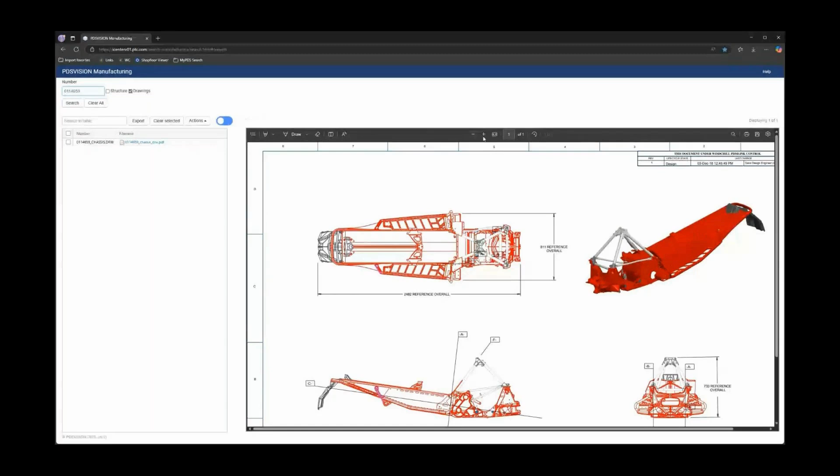Finally, we can swap over to a more manufacturing view, which is a cut down view simply used for retrieving drawings from within the system. If you've got people on the shop floor following a set of work instructions who need to follow a sequence of drawings, or quality wants to do the same, you can use the built-in inline viewer for users to quickly follow through a series of drawings on screen on the shop floor.

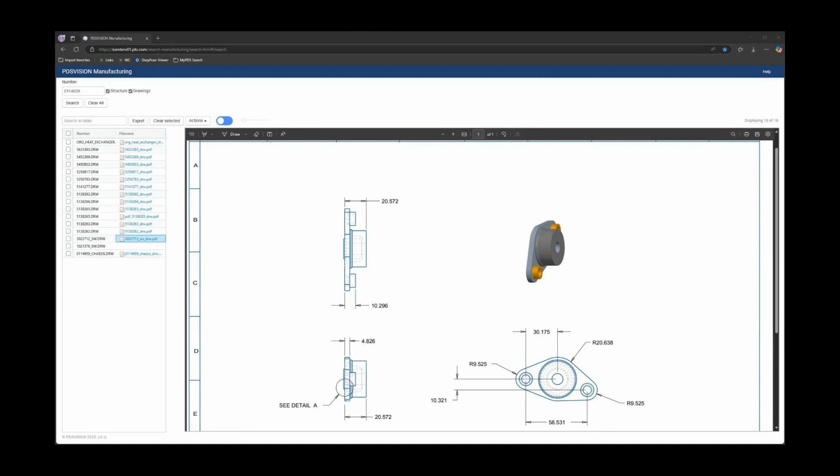So My PDS Search is highly configurable. You can have multiple different views for different departments within the business, giving everyone an extremely easy to use tool that can access and pull information out of the PLM tool.

For those infrequent users, Windchill can often feel a bit complex and off-putting, which leads to delays, data requests from other users within the business, or ultimately mistakes. My PDS Search is designed to simplify that access and reduce the burden on power users, making everyone more self-sufficient. It eliminates uncertainty, ensures users get the latest data, and automates repetitive lookup tasks.

We didn't show it, but you can have saved searches via URLs to perform the same search actions. Lots of different departments are often searching for the same stuff over and over again, and we can help automate that.

Search provides a clean and user-friendly interface that makes finding product data fast and intuitive. Whether you're in engineering, purchasing, or quality, you can locate drawings, documents, parts, and related objects without needing deep Windchill knowledge.

Something else we didn't show is a capability of My PDS Search called on-demand publishing. Users often request things from people in engineering, like 'can I have that drawing?' or 'can I have a STEP file of this model?' With on-demand publishing search, users can generate those files automatically from within the system, freeing up your engineers to get on with the engineering work.

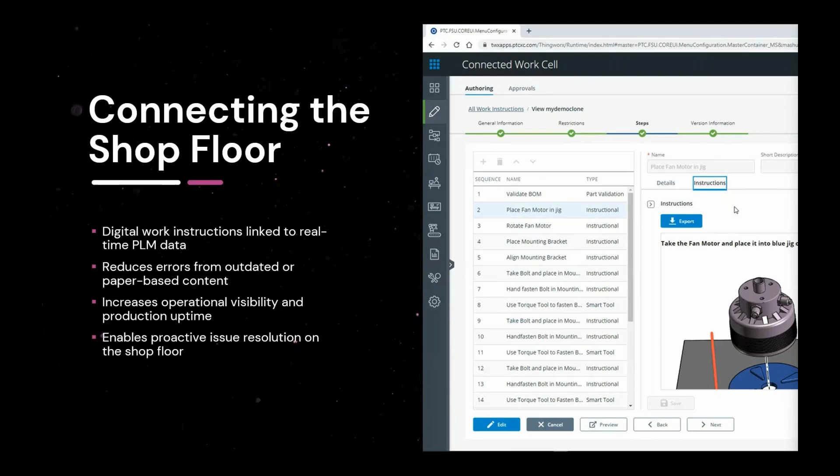Something like Connected Work Cell ensures that manufacturing teams are working with live data straight from PLM, and gives engineering visibility into production performance, helping to spot things like bottlenecks or issues before they actually become a real world problem.

So if we take a look at Connected Work Cell, it's a ThingWorx-based application, but communicates and pulls information directly from Windchill, where we can generate these process plans. As a user on the shop floor, I can log in as my user, and I can retrieve a particular work order, either by logging in as my user when I've been assigned, or I could scan a barcode off the piece of equipment I'm about to work on.

That can go away and retrieve the information required and the work instructions I need to carry out that operation. With Connected Work Cell, it's a web-based application, and at the top there you can see we're presented with a series of metadata. We can find the work order number, our start time, the planned end time for this information, and all of this information is being generated within Windchill.

We've also got a timeline and the individual steps required for the shop floor user to carry out, and users are free to jump backwards and forwards and take a look at all of these individual steps. Below that, in the main graphics window, we've got the information the user is going to follow along with, the written instructions, the visual data generated from the 3D CAD in the engineering space.

On the right, users can provide feedback and information based upon the steps. Maybe they've encountered an issue, or they want to raise a problem report - they can do all that from within the interface. We can also see targeted cycle times and the amount of time it should take to complete the whole work order. Again, this is all information that's been set within Windchill.

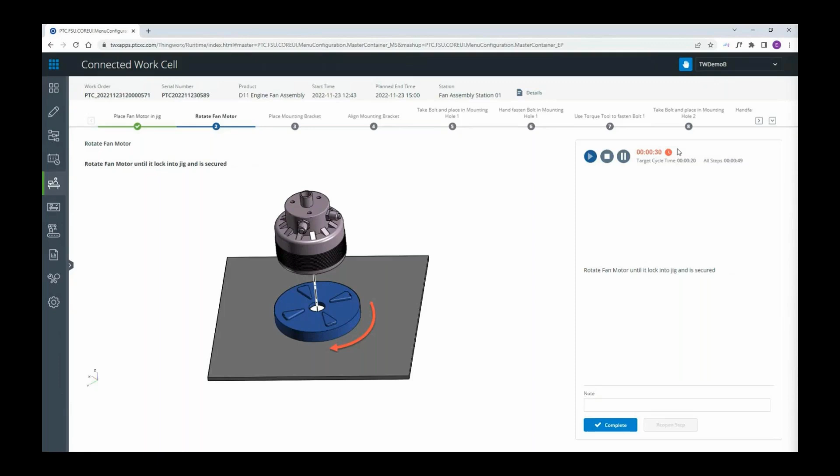Users are also notified when they're overrunning on time. And on the analytical side of things, this gives the business insight into whether things are running on time, and insight as to why they're not, those sorts of things.

Users on the shop floor can also interact with the work instructions a bit more. We have 3D data, but we can also provide feedback - maybe I've got a pause for a particular reason, maybe a planned break. Information like that can be reported and logged within the system. Or maybe I've got to stop the project completely - maybe there's a quality issue or something on the line's gone wrong and things have to stop. Again, all of that information and data can be collected and analyzed at a later date.

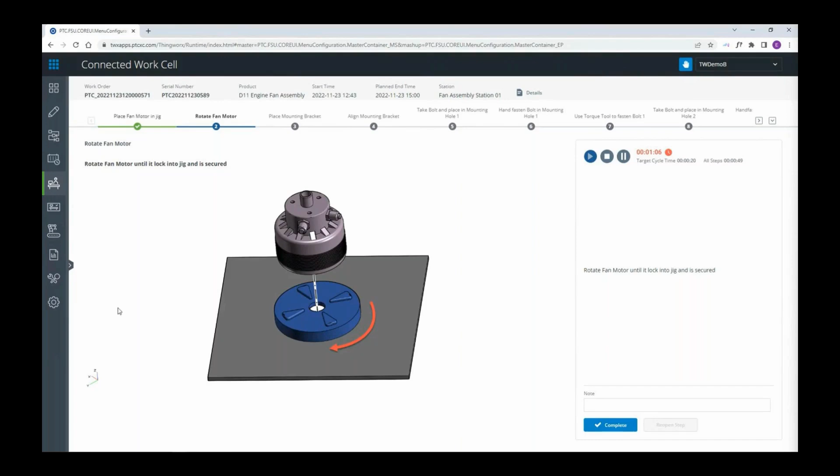So all of that reporting is another topic - I'm not going to get into too much detail today, but reporting and the link between Windchill means that as and when changes happen, all of these components become linked together and everything gets updated.

So, connected work cell then - it tackles that classic disconnect. When operations and engineering aren't aligned, things can go wrong, whether that's a visibility issue, a versioning issue, or simply a data handoff. Connected work cell helps solve that by connecting those systems, people, and processes all in real time, so the data retrieved from Windchill is live and correct.

Connected work cell transforms how production interacts with engineering data. It ensures shop floor teams get up-to-date instructions, that live data.

Not only do we have the 2D imagery on connected work cell, but users also have access to that 3D data - similar to how we've talked about Creo viewing and interacting with 3D models. Users can spin models around, get a better understanding, better context of what it is they're working on. All of that means faster setups, better execution, and real-time visibility into performance, with the monitoring capability to understand what's actually going on the shop floor.